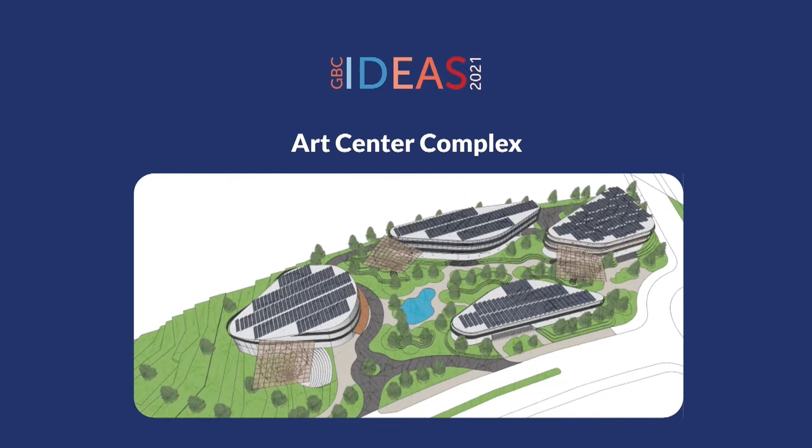Good afternoon, ladies and gentlemen. We would like to say thank you for coming to our presentation. It's great to see you all. First of all, let me introduce myself. My name is Tika Hanjani, and this is Lutfi Landrian, and another one is Aryo Wicaksono. Today we'd like to present our proposed idea for Art Center Complex in Kota Baru Parahyangan for the professional category.

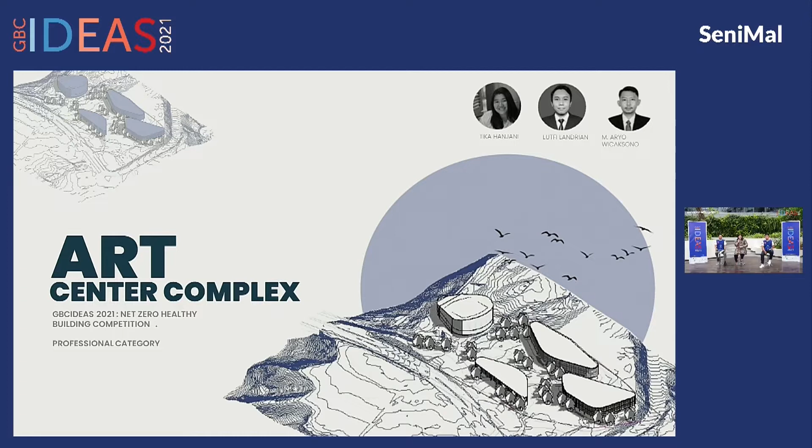In this presentation, we are going to discuss the background, then we'll move to the strategy approach and come up with the conclusion. Next, please.

We start with the issue that we owe too much to our future generation, as we contribute 39% of carbon emission. To be responsible toward the environment and to be responsive, we need to be questioning our position today.

So a new perspective is a must to achieve net zero healthy and natural ventilation. We need to improve natural ventilation, daylight, artificial uses, and visibility to improve indoor air quality with zero energy, which can operate without carbon emission, supported from on-site or off-site, or convert renewable energy compensation, and of course comply with the SDGs.

And at the middle part, you can see our strategy approach, which will be explained along the way.

And for sure, we say no to BAU, business as usual. Why? Because we want to make it more healthy and more sustainable, not just an over-engineered system, placeless, unhealthy, or uninspired environment. We need an integration.

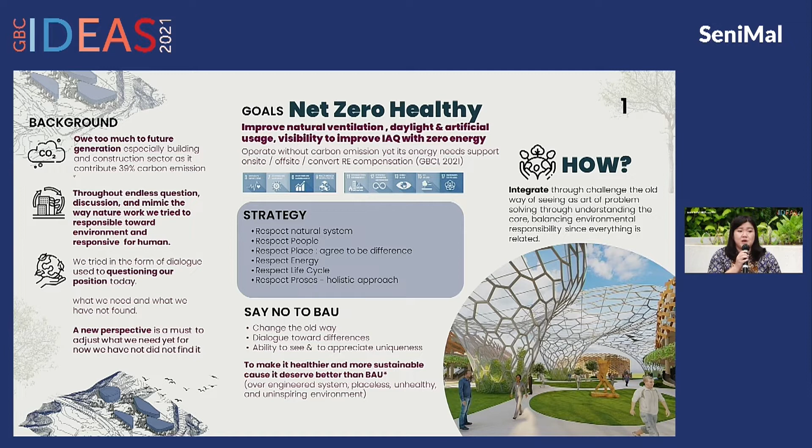Next, please. Diklik. Boleh diklik.

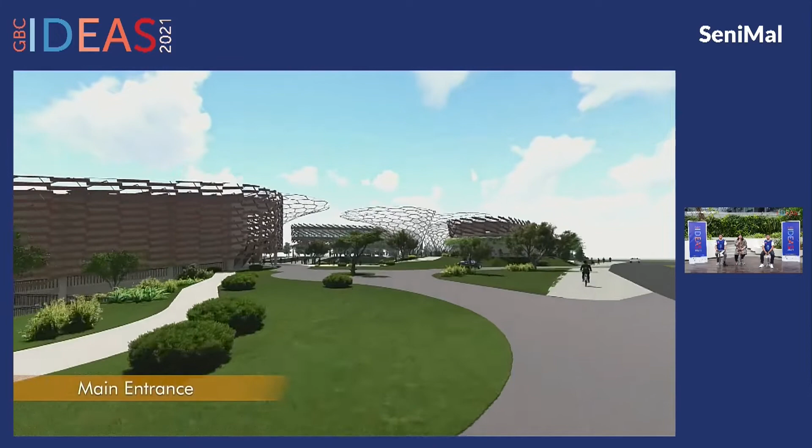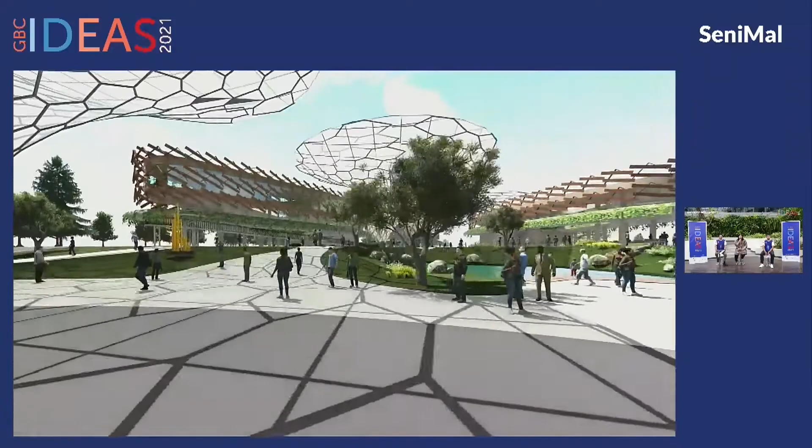We are going to show you the natural system, the site potential. This site is located in the west part of Bandung with hill contour, providing wind velocity and unique terrain. We did a simulation for weather over the last 2 years, and we found that the operative temperature average is 23.6 with humidity at 77.4, and rainfall at 536 millimeters per year.

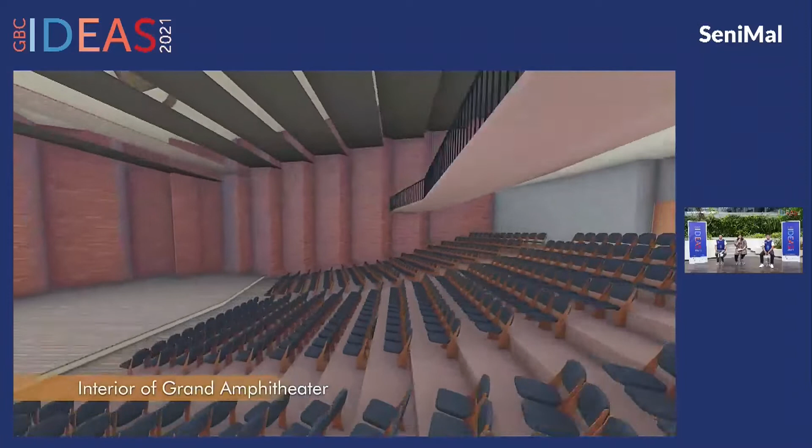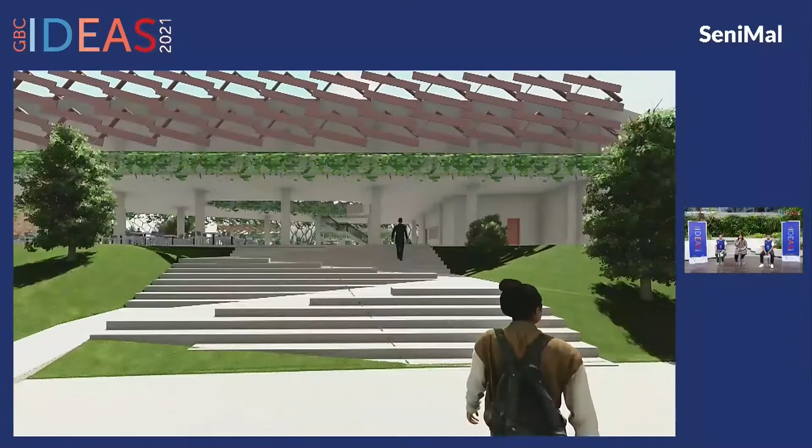So we assume that this site is possible to use 100% natural ventilation for operational hours, with airspeed of 0.8 meter per second, met rate of 104, and clothing rate of 1, like a winter cloth. And we try to optimize the condensation at dawn by utilizing it for atmospheric water harvesting.

And let us turn to the people. We focus on thermal comfort, and we analyze two systems, mechanic and natural, based on ASHRAE 62 and 55.

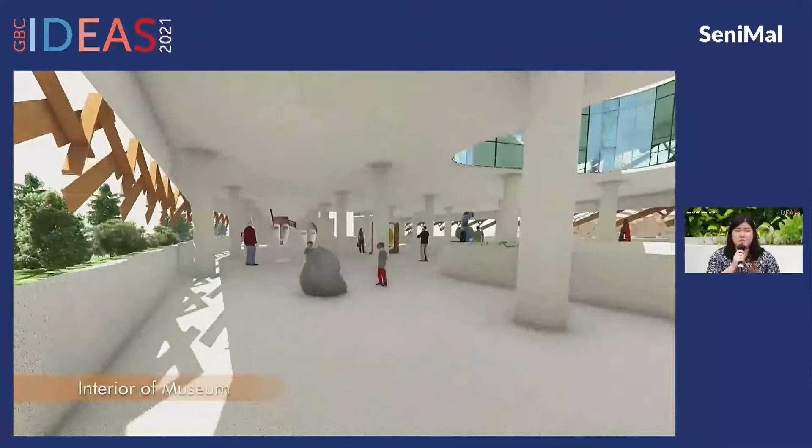We've come up with, for the mechanic one, if they feel comfortable at 23.5 with PPD 7%, if it is less or more, the PPD will increase from 30 to 35. They just feel slightly cold or slightly warm.

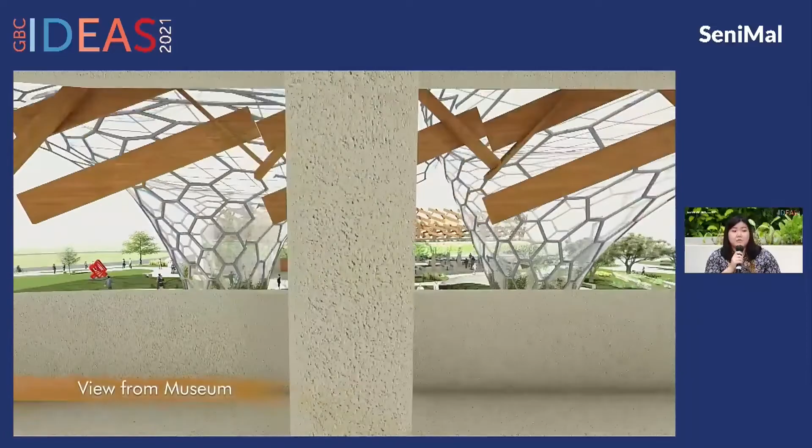And more on the adaptive comfort, surprisingly, it is comfortable for sitting, standing, or walking in the same ambient, which is like 25 up to 27.

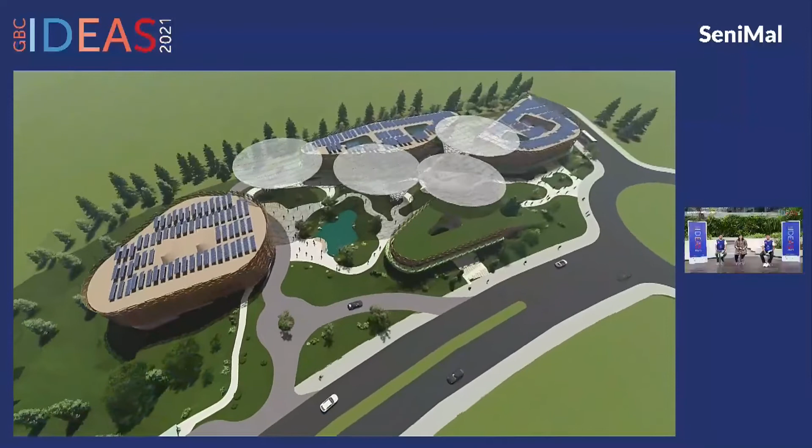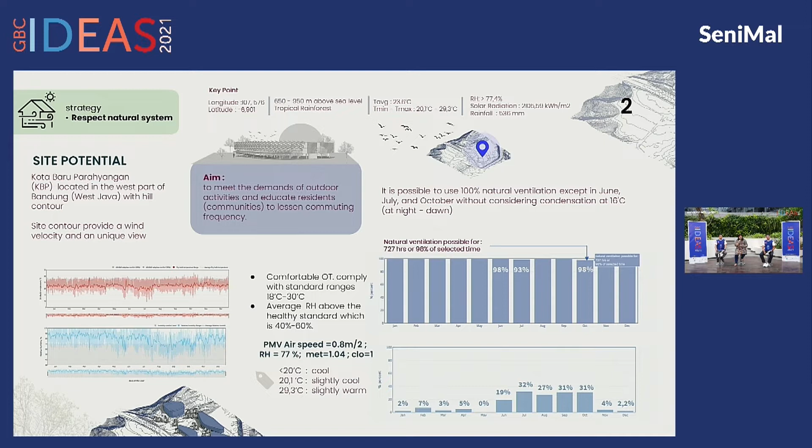The next one is our natural system, the site potential that we already explained before. This is the site potential, and the next one is at the far end of the picture.

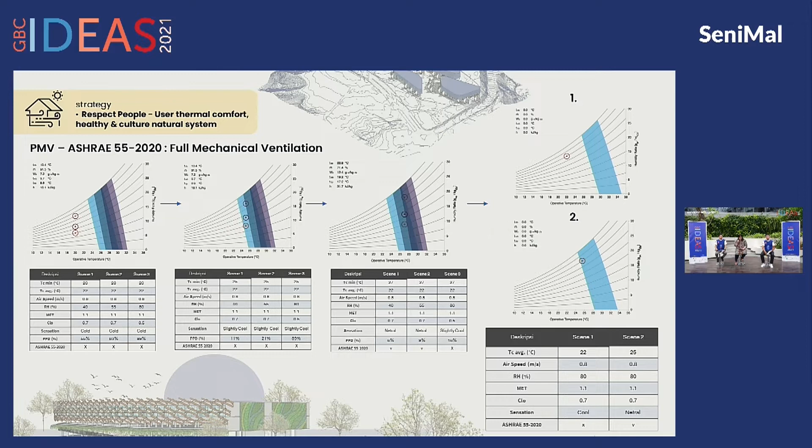And the next one, we also take the adaptive comfort as we explained before, which validates our hypothesis that it is possible to use 100% natural ventilation, as both mechanic and natural feel comfortable in the same range.

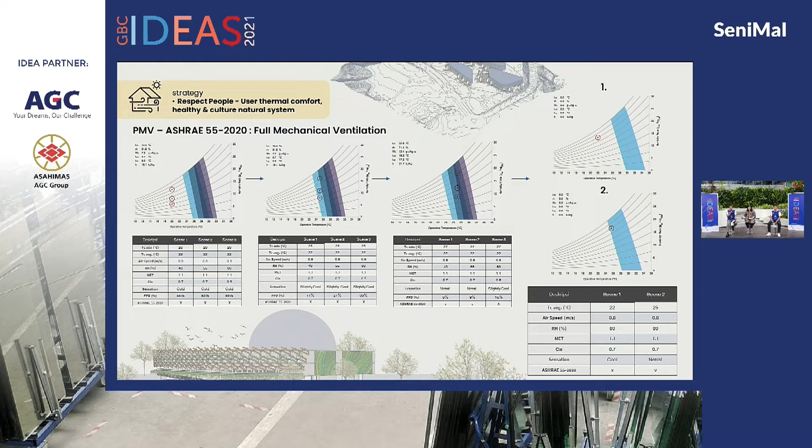As you are all aware, each site is unique, so it's not necessary to be exactly the same. It's formed by wind flow from east, south, west, and north, enabling a permeable design for water, wind flow, and park use. It's adjusted with unique terrain and facets formed through wind flow analysis for cross ventilation.

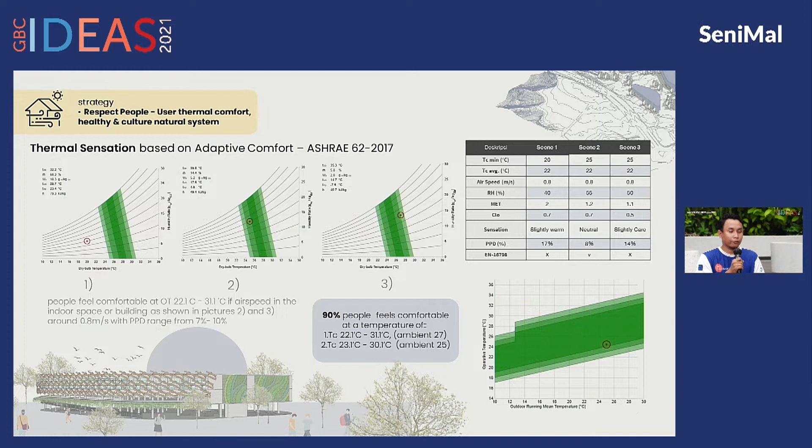Consequently, for the building mass, we set back 14 meters as a green buffer with two axes connecting the building to the street. We raise the mass to form open space below the building for Ngariung, a cultural gathering.

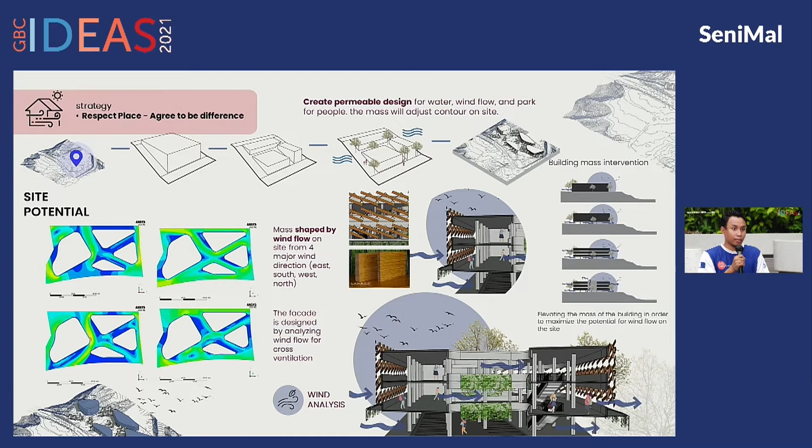As adjusted with wind flow, the mass forms permeable buildings with natural ventilation across the inside, creating a stack effect for each building. We also add harvesting for an internal water cycle and water storage in the slope area of the site.

We expect this to become a place of recreation for residents and the surrounding location, reducing vehicle carbon emissions.

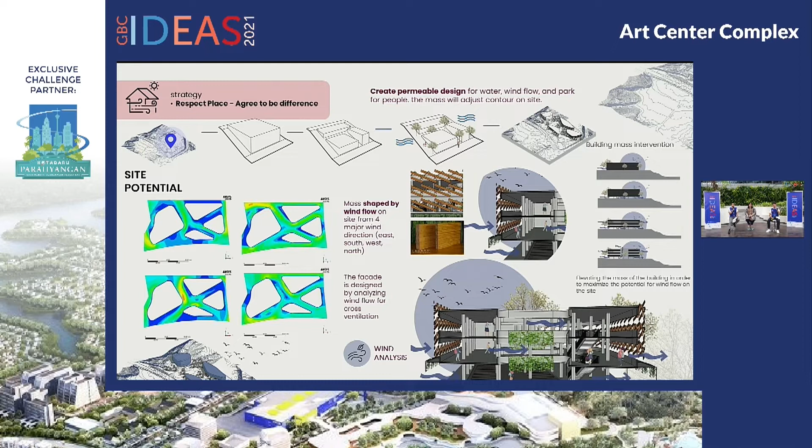We try to adapt social, cultural, economic, and environmental aspects. Ngariung is chosen as the local culture where people meet together, weaving life. To support this, we develop and raise the lower part of the building into pilotis to provide extra space for gathering, weaving life.

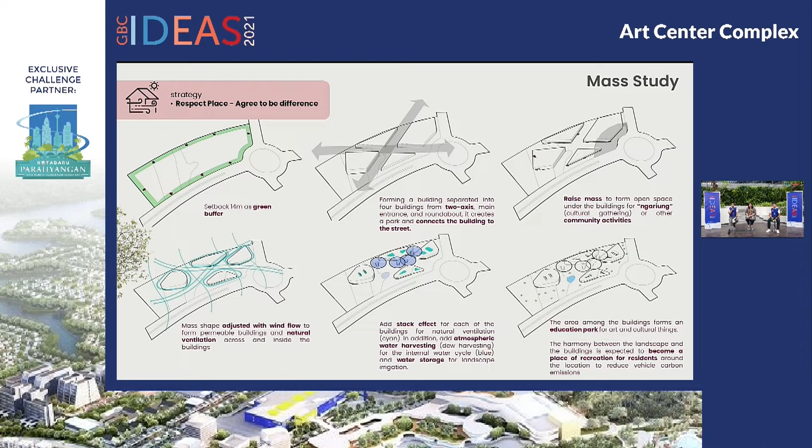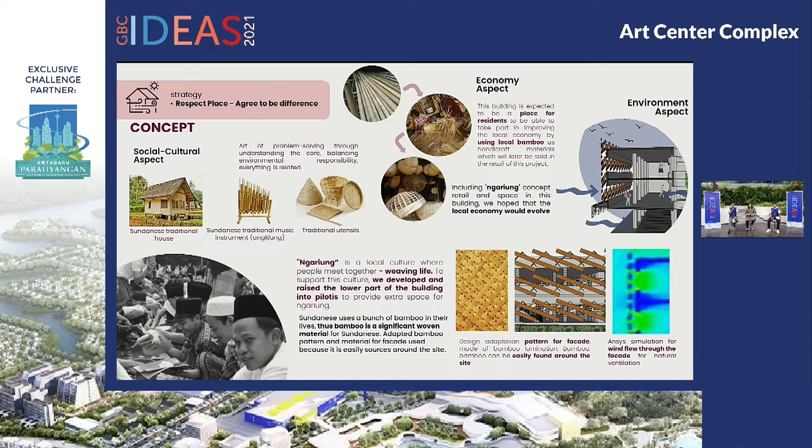Bamboo is important as Sundanese people use a bunch of bamboo in their life. We not only adapted bamboo's basic pattern and material for the facade, but also adjusted wind flow within the space. Why? Because it's easily sourced around the site, environmentally friendly, and hopefully able to support the economic aspect to provide a circular economy. Let's take a look at our plans for the museum and retail.

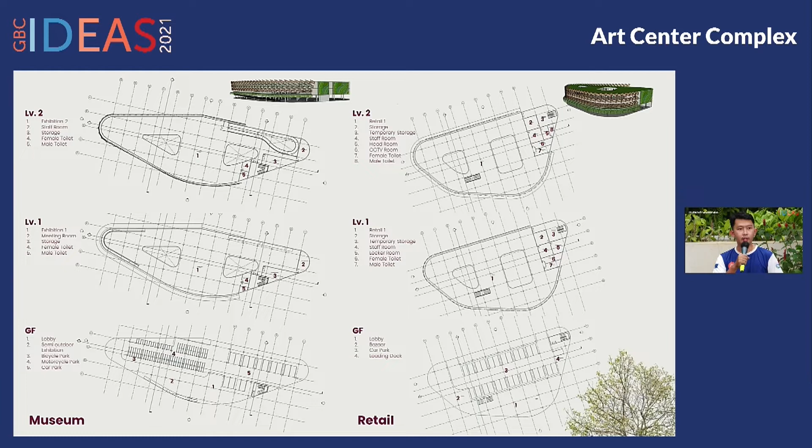Responding to the site's uniqueness, as we can see on the plan view, the way wind infiltrates from four directions into the site validates the possibilities for natural ventilation and thermal comfort, adapted through the pattern on the facade, also minimizing the temperature difference between indoor and outdoor.

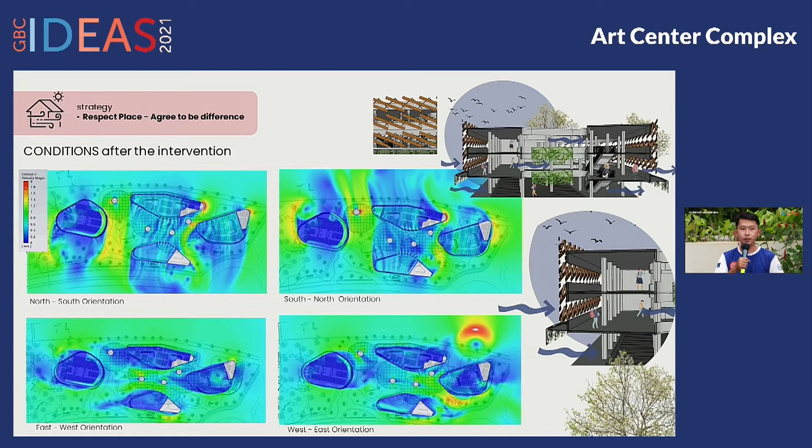This is the section plan. As we can see together, this simulation shows the wind distribution inside the building, except the museum. The upper floor is a specially conditioned space, thus it is not naturally ventilated.

This complex uses 40% for building, with an interactive open green space of 5,600 square meters, supported by public transport.

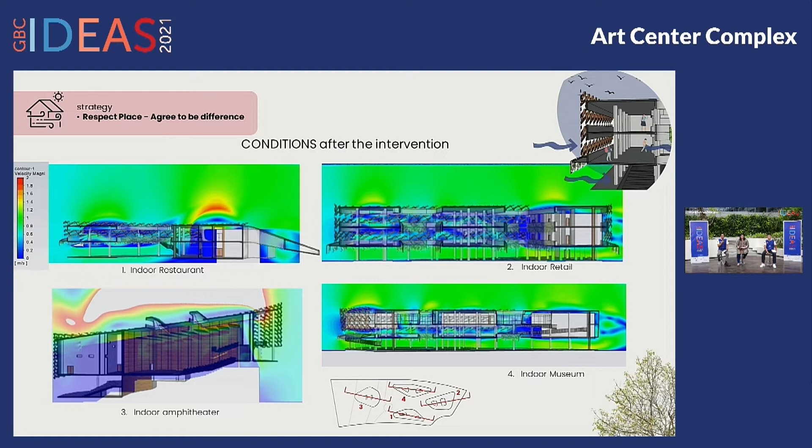When we compare baseline and post-optimization energy, most of the buildings reduced their energy usage: for the restaurant, 51%; museum, 68.1%; retail, 91.4%; and amphitheater, 60.6%.

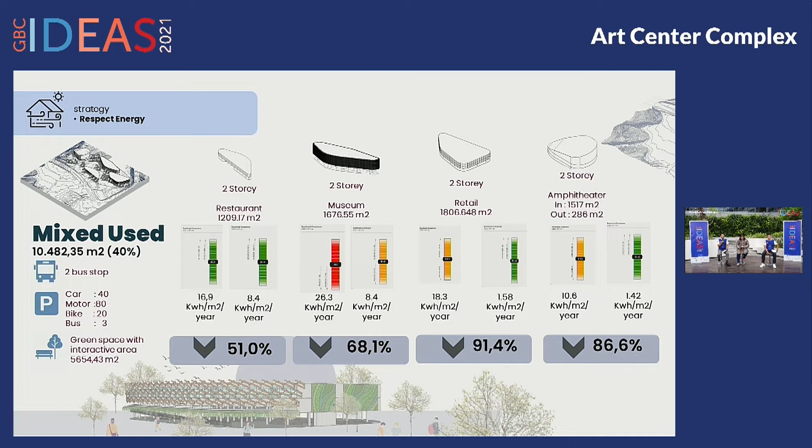Passive systems such as optimized natural ventilation, maximized openings, lighting efficiency, daylighting and occupancy sensors, plug load efficiency, and PV panel efficiency were employed to decrease energy usage as a baseline, and are able to comply with ASHRAE 90.1 at 225.

But it's not good enough, so we did some optimization. And of course, after some optimization, for example, next please.

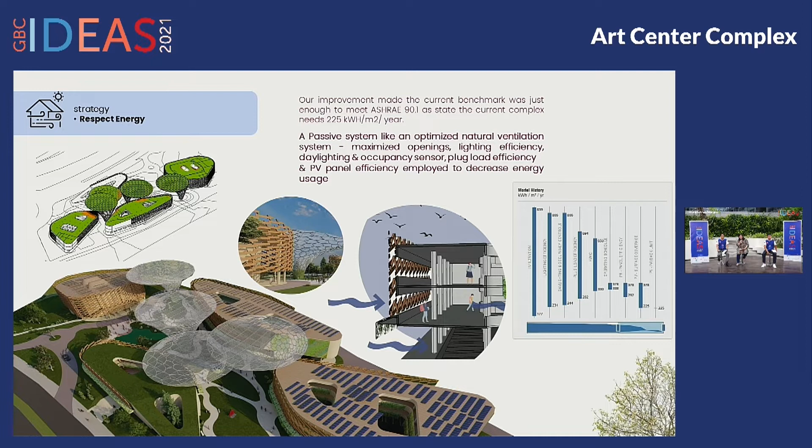For the PV coverage surface and lighting efficiency, combined with a control system for daylight and occupant control and plug load chains, it reduced further, and we got 51.7, which not only complies with ASHRAE but also the Architecture 2030 challenge, and is also a bit lower than the standard.

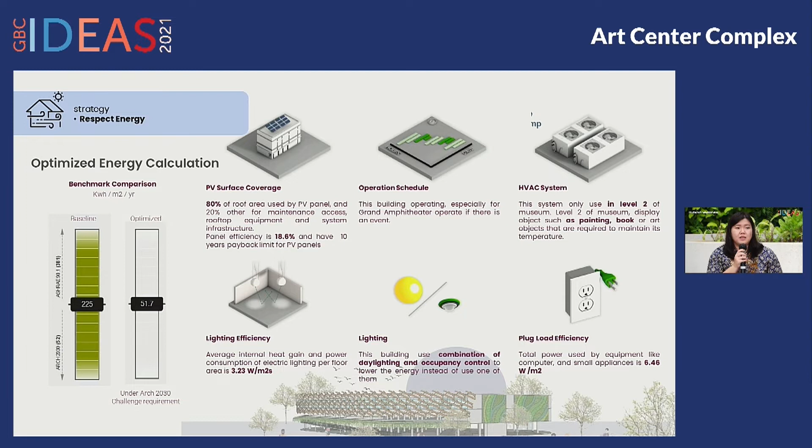The difference is we can double up the energy from the PV, but the payback period is just slightly different, by 7 months. However, we found that in some areas it might cause overshadowing, which means it won't work really well.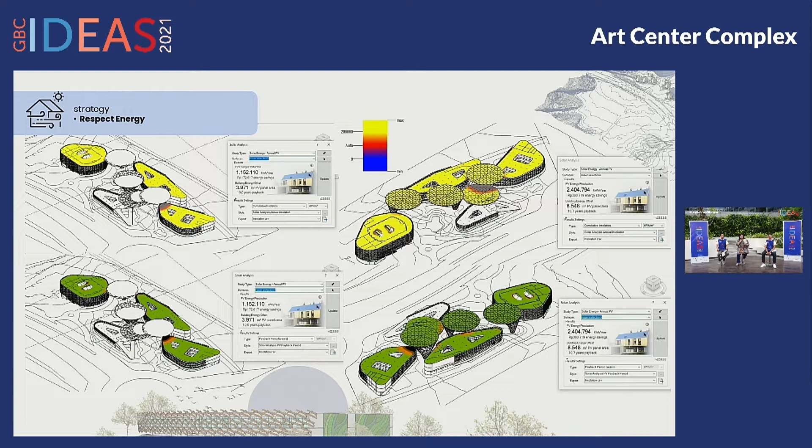That's why we go with the other option: option two, where we reduce the RE coverage up to 80% from the selected area, removing the unfeasible PV canopy due to shading.

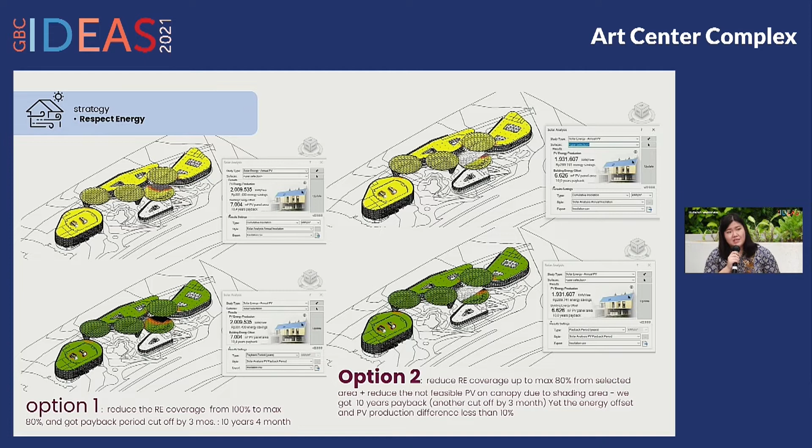Next, I'd like to discuss daylight. Referring to illumination standards by LEED, it shows only 49% daylight able to penetrate into the space.

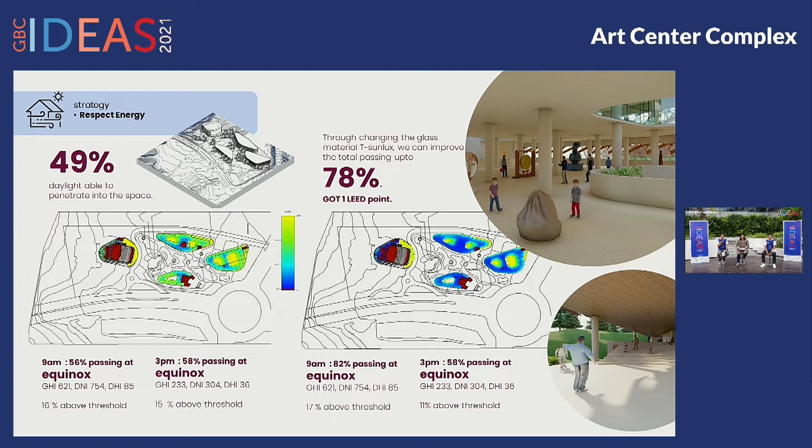We set the simulation on CIE overcast as we refer to current CBDM, GHI, DNI, and DHI, especially clear sky duration inside. We found that for some areas, like the auditorium, and services like toilet, kitchen, back office, museum, and storage, there is still lack of daylight due to building space requirements for function, safety, and privacy.

But when we change the glass material, there is an improvement with total daylighting up to 78%. That's all I have to say about energy, and let's move to life cycle.

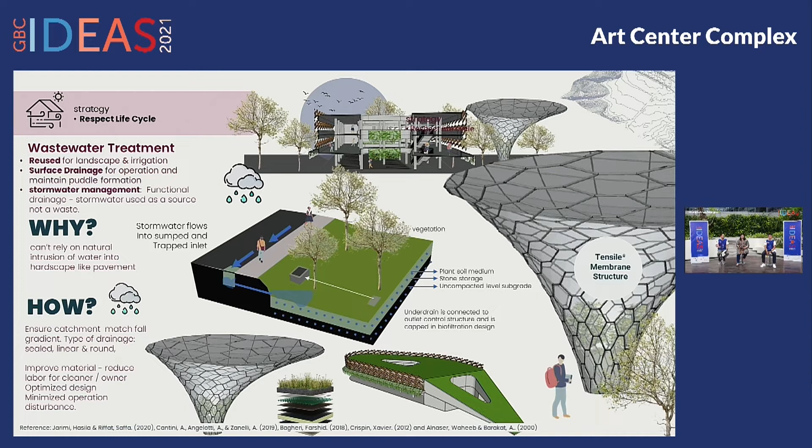Why water treatment? Because we can reuse it as a source instead of waste, through mimicking the natural infiltration process. And through surface drainage and stormwater management, we can reduce operation and maintenance later on.

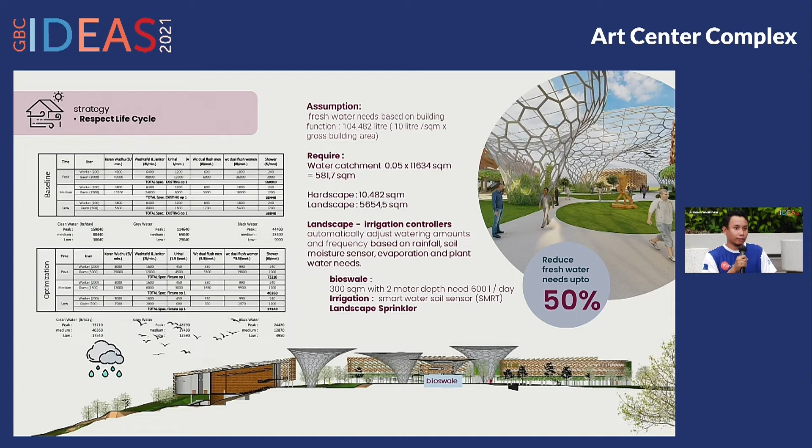There is a bioswale where the rainwater gutter connects directly to the green area. There is also atmospheric water harvesting dew collector as an internal water cycle. To harvest water vapor, we use tensile membrane structure and active condenser through thermoelectric, collecting a minimum of 1.3 liters per meter square per hour.

Freshwater assumption demand based on building function is around 104,000 liters. Let's consider this in more detail comparing the baseline for green building and the optimization. By changing the fixtures, we are able to reduce another 50%, with the assumption ranging from peak to low, within the range from 73,000 up to 17,000 liters.

This demand is supported by condensed water from the dew collector, rainwater, PDAM, and roof garden, and the wastewater might be used for the landscape, which needs a controller.

Here's our water cycle scheme with approximate capacity. Fresh water from several sources was metered and filtered before being distributed, to improve efficiency, installation, and maintenance. We also plan to have a water recycle treatment plant and recycle water tank to utilize the gray water before it's distributed to sewer.

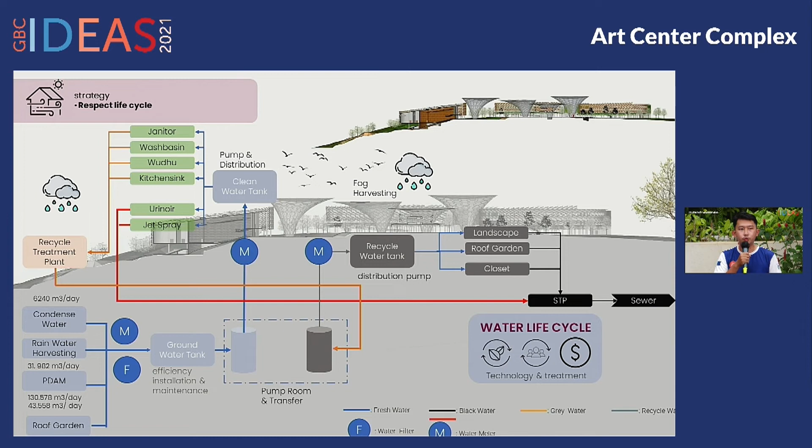Next is the LCA, life cycle analysis. We have an option with the current area on site: 0.23 hectare for trees, 0.86 for bushes, and 0.43 for prairie.

And even though we do all those things, we still need to address upfront embodied carbon. That's why we choose to plant trees as compensation, because it is easy, it is cheap, and most importantly, it absorbs carbon.

If we look at the BAU and LCA optimization, for BAU, the building and landscape need another 9,945 years for balancing, while with optimization, we can cut it down by 50%.

For the plants, we choose Samanea saman to reduce pollutants, as it is almost 28 times better than other options. For shading, we go with the flamboyant tree, and for the slope area next to the riverbank, we go with bamboo.

This is not the only option. We have others, but we chose these three because in the long term, other options might damage the building structure.

Let's look at the detail between BAU and optimization. With BAU, we need to compensate around 3,200 hectares of trees for carbon compensation, but if we optimize it, we can cut it down by 50%.

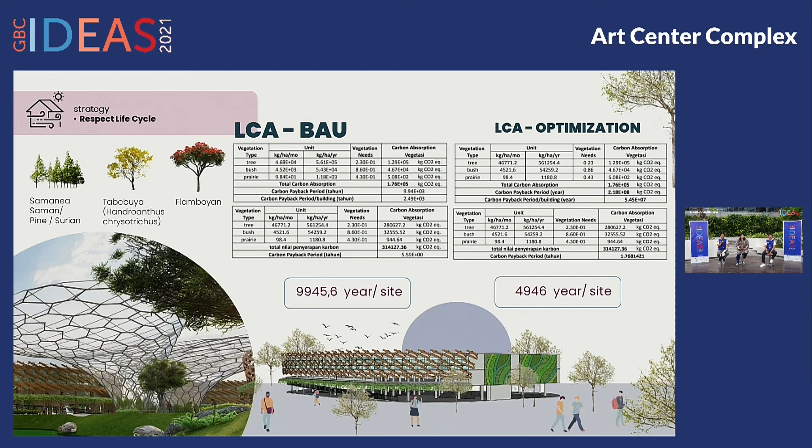In conclusion, as mentioned by Mies van der Rohe, we should attempt to bring nature, building, and human beings together in higher unity to achieve a net zero healthy building. Thank you for your kind attention in joining the presentation.